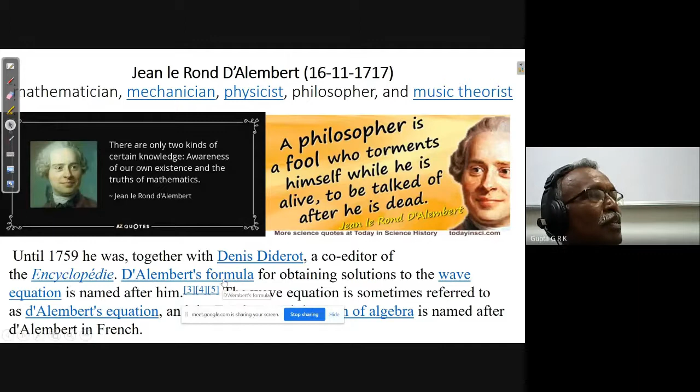So we will have lecture 36. Last class we did some problems on exergy of kinetic energy and exergy of heat transfer from a reservoir. The complete kinetic energy is exergy, or available energy. When you have heat transfer, only part of it is available and the remaining is unavailable energy - that is W reversible. If I have a reversible engine working between the reservoir and the sink, which is at environment conditions, that work is called the exergy.

When temperature is varying, I have to take the integral. We also saw second law efficiency: out of the reversible work, some work is lost due to irreversibilities, and because of this, useful work is less than reversible work. Second law efficiency is the ratio of useful work to reversible work, and it's also the ratio of first law efficiency to Carnot efficiency.

And the exergy of compressed air in a tank - if I have some highly compressed air in a particular tank, I can find out the exergy, because we know the exergy of a closed system. And the change of exergy during a compression process: whenever compression or expansion takes place, initially there will be some exergy, and after that there will be some other exergy. The difference is the change of exergy, and we lose some exergy because of the real process.

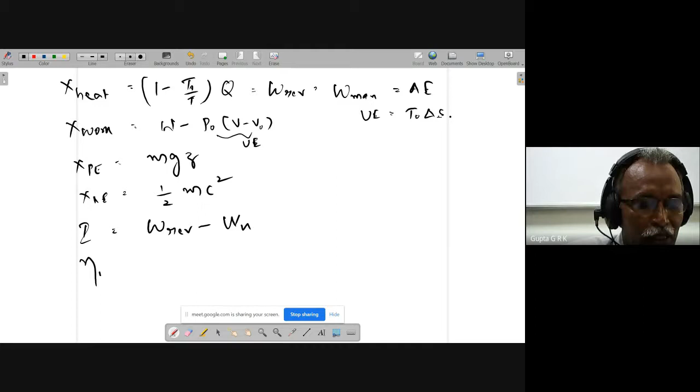And X of P is equal to mgh, mgz, and X of Ke is equal to half mc square. And if irreversibility is W reversible minus W useful, and second law efficiency is WU by W reversible, or if first law efficiency by Carnot efficiency, or 1 minus X destruction by inlet exergy.

And if you see the exergy of closed system, that is phi, for closed system, is equal to U minus U0 plus P naught into V minus V0 minus T naught into S minus S naught. If I have potential energy and kinetic energy, this is the exergy per unit mass, kilojoules per kg.

And if it is a flow system, this is X closed. So X flow is equal to psi. This is given by H minus H0 minus T naught into S minus S naught plus C square by 2, GZ. So this is the exergy of a flow system.

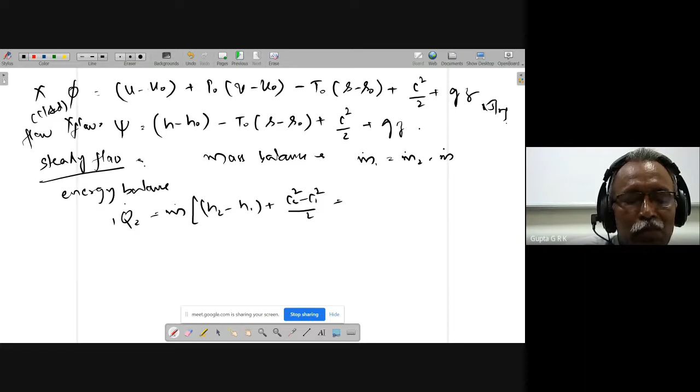And if I have in general steady flow equations, we will have mass balance, that is m dot 1 equal to m dot 2 is equal to m dot, and energy balance is: q dot 1 q2 dot is equal to m dot into h2 minus h1 plus c2 square minus c1 square by 2 plus g into z2 minus z1 plus w dot 1 2. And if I take entropy balance,

so we can write S dot gen is equal to m dot into S2 minus S1 plus sigma Q dot k by tk. And if I take exergy balance, for a steady system, taking dS CV by dt as zero, dX CV by dt as zero like that, X destruction is equal to m dot into psi1 minus psi2 plus sigma 1 minus T naught by tk Q dot k minus W dot. And this is also equal to T naught S dot gen.

So you can calculate X destruction either from this formula, or you can find out S gen from this formula, and T naught into S gen also gives the exergy destruction. And if I want to calculate S gen, I have to calculate the change in entropy and all.

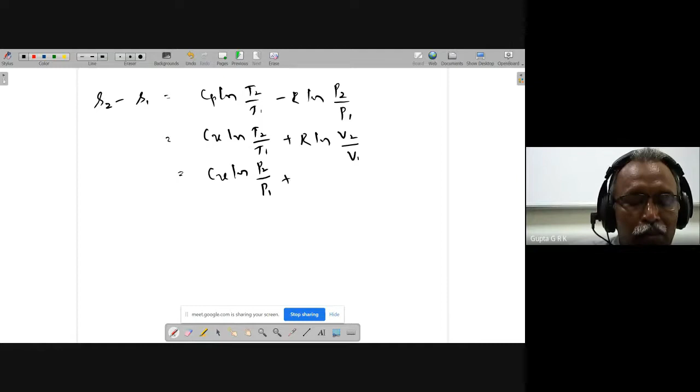And change in entropy also we have the three formulae from TDS relations. We got Cp log T2 by T1 minus R log P2 by P1. If it is a constant volume process or something like that, we can use Cv log T2 by T1 plus R log V2 by V1, or the other formula Cv log P2 by P1 plus... Cp log V2. So like that, we have three different formulae for finding change in entropy.

Because change in entropy is needed when I want to find out the change in exergy. Suppose if I want phi2 minus phi1, that will be u2 minus u1 plus p naught into v2 minus v1 minus t naught into s2 minus s1 plus c2 square minus c1 square by 2 plus g into z2 minus z1.

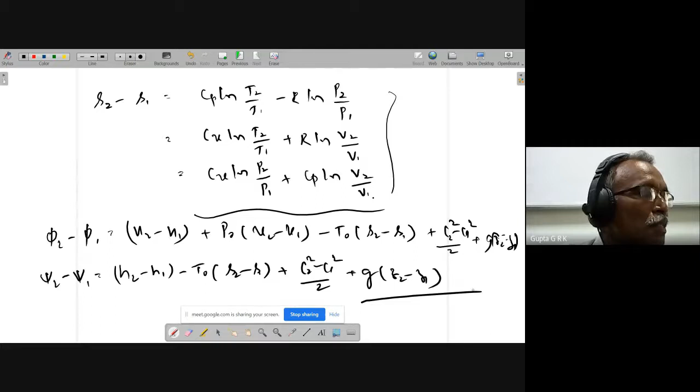And if I have a flow system, the change in exergy is psi2 minus psi1, which is h2 minus h1 minus t naught into s2 minus s1 plus c2 square minus c1 square by 2 plus g into z2 minus z1. So these are the different formulae that we come across in the availability or exergy chapter.

Okay, Raymond is asking for the solutions of problem 7. Do you want that, or exergy problems? Which way would you like to go? I think I have made this problem with answers. I think we can go through this.

A heat engine works between 300 Kelvin and 1200 Kelvin, taking heat at a rate of 500 kilowatts. Maybe, I don't know, the order may be different, so you can just check, these are all the problems. A heat engine works between 300 Kelvin and 1200 Kelvin, taking heat at a rate of 500 kilowatts and giving an output of 180 kilowatts.

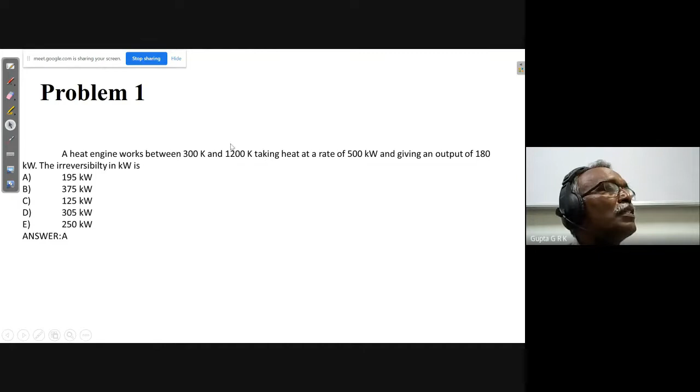Find the irreversibility. The irreversibility is W reversible minus W useful. W useful is given to be 180 kilowatts. W reversible, because I know TH and TL, I can find out efficiency, and efficiency into heat gives W reversible. This is only the questions for now.

Yeah, just 3-4 minutes. I will. It is in another computer. I will just send by mail.

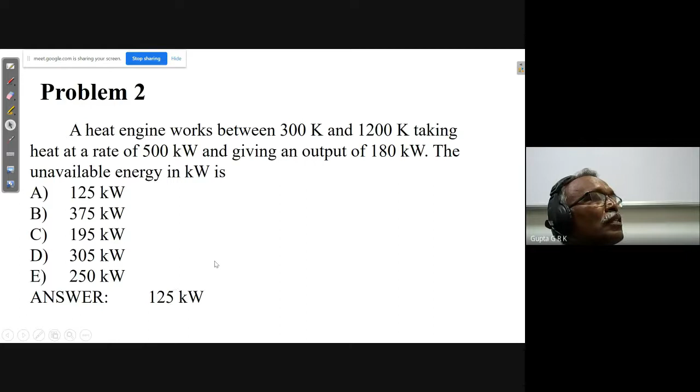A heat engine works between 300 and 1200 Kelvin, taking heat at a rate of 500 kilowatts and giving an output of 180 kilowatts. Similar thing, only it's asked to find out unavailable energy. Because we have seen W reversible as 375, so 500 minus 375, that is 125 kilowatts is the answer.

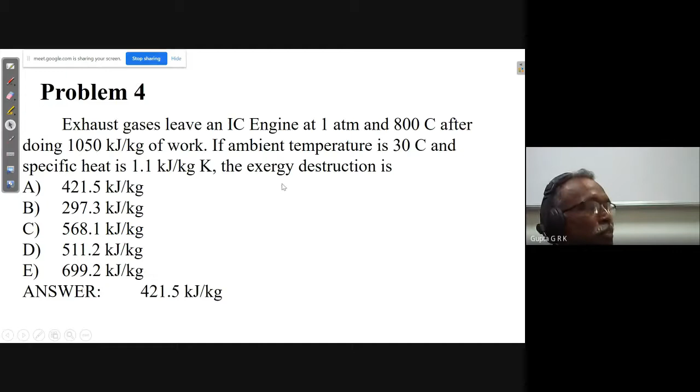Exhaust gases leave an IC engine at 1 atmosphere and 800 degrees centigrade after doing 1050 kilojoules per kg of work. If ambient temperature is 30 degrees centigrade and specific heat is 1.1, find the exergy destruction. Because exergy destruction is T naught into Sgen, and Sgen is delta S, which is Cp log T by T naught. Cp is given, and with log T by T naught I can find the exergy destruction.

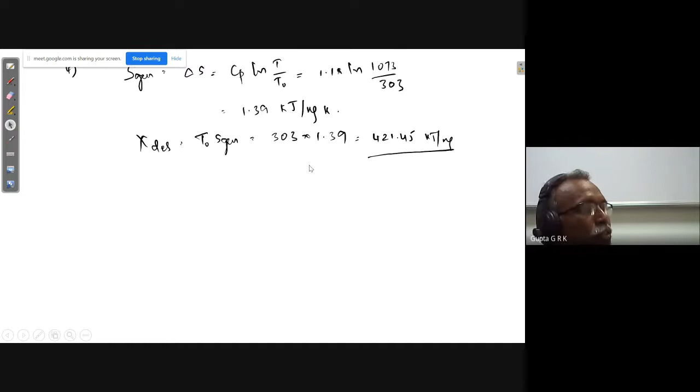The steady state heat loss through a wall is 1 kilowatt, whose wall temperature is 30 degrees centigrade and 5 degrees centigrade on either side. If the ambient temperature is 0, find the exergy destruction again. We have done this in class with wall temperatures 30 and 5 degrees. This is Q by T naught Sgen, so Sgen is Q by T2 minus Q by T1. I can find Sgen, and then T naught into Sgen is the exergy destruction.

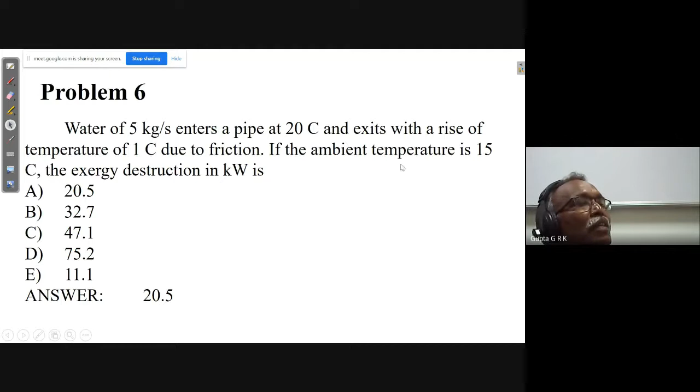Water of 5 kg per second enters a pipe at 20 degrees centigrade and exits with a rise in temperature of 1 degree centigrade due to friction. If the ambient temperature is 15, the exergy destruction again equals Sgen, which is change in entropy, MCP log T2 by T1. There's a 1 degree temperature rise, so 294 by 293, and 5 is the mass. This gives the exergy destruction.

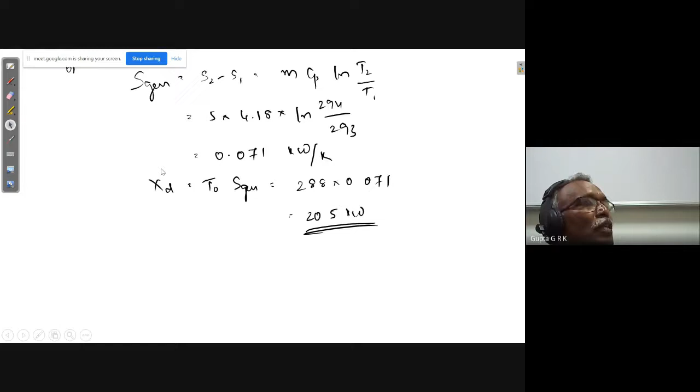150 tons of water is stored at a height of 100 meters. Its available energy is just mgh. M is 150,000 and g is 9.81 and height is 100. Because potential energy is completely available, 150,000 times 9.81 into 100 meters. So I will get it in kilowatt hours as asked, so I have to divide by 3600.

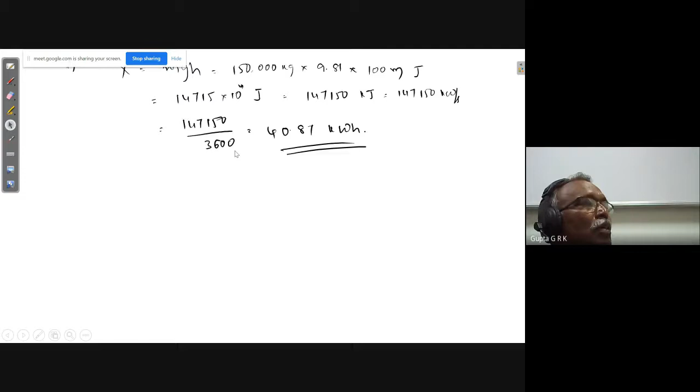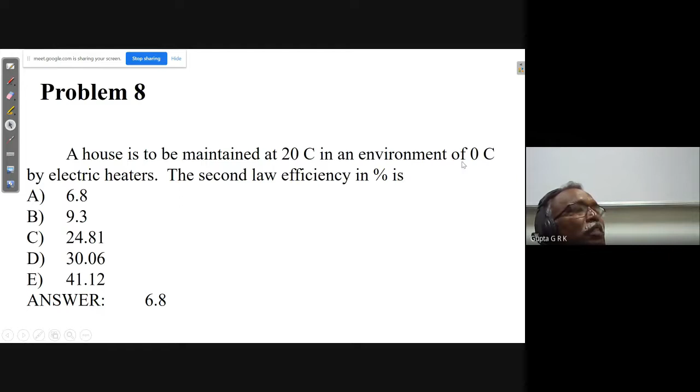A house is to be maintained at 20 degrees centigrade in an environment of 0 degrees centigrade by electric heaters. Find the second law efficiency. This also we have done in class. When I have electric heaters, the first law efficiency will be 1, or COP. So COP according to the first law is 1 because the electric power given is equal to heat developed. So COP is 1, and COP reversible I can find from the two temperatures, and COP by COP reversible gives the second law efficiency.

COP of the electric heaters is 1, and COP of reversible is TH by TH minus TL, which is 14.65, and second law efficiency is COP by COP reversible.

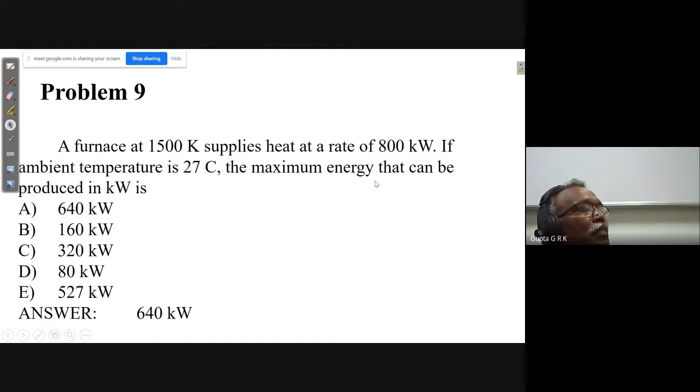So we have a furnace at 1500 Kelvin that supplies a heat rate of 800 kilowatts. If ambient temperature is 27, find the maximum energy that can be produced. Again, I have two temperatures given and heat is given. I have to find out the exergy of the heat, so 1 minus T naught by T into Q.

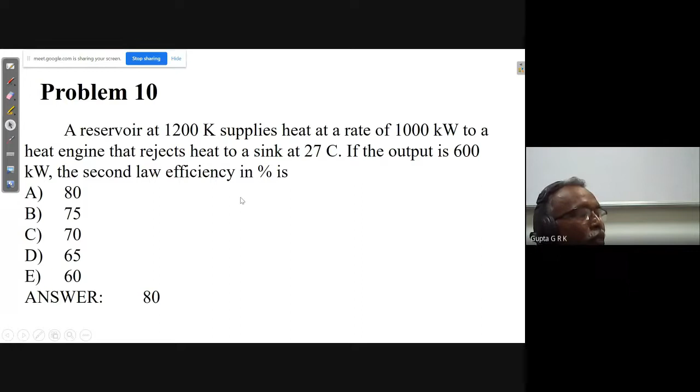A reservoir at 1200 Kelvin supplies heat at a rate of 1000 kilowatts to a heat engine that rejects heat to a sink at 27 degrees centigrade. If the output is 600 kilowatts, find the second law efficiency. Again, find out W reversible. W useful is given as 600, so I can find out second law efficiency. So with 600 and 1000, this is first law efficiency, and the reversible, this one is 0.75, and the second law efficiency is 80%.

It's T naught S gen. Again, S gen is delta S. Delta S is Cp log T2 by T1 minus R log P2 by P1. Because temperature is constant, this goes off, so it's minus R log P2 by P1, which gives the change in entropy or S gen. Mass flow is given, so I multiply by that to get it in kilowatts. So the destruction is T naught S gen.

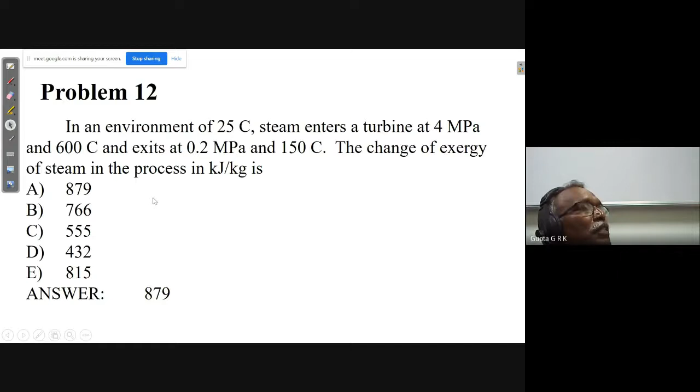In an environment of 25 centigrade, steam enters a turbine at 4 megapascal and 600 degrees centigrade and exits at 0.2 megapascal and 150 degrees centigrade. Find the change of exergy of steam in the process. The inlet and exit conditions are given, so I can find out H1, H2, S1 and S2. The change of exergy, Psi2 minus Psi1, is H2 minus H1 minus T naught into S2 minus S1. So like this I can find it out.

And dx is the decrease in exergy actually, so I put h1 minus h2 minus T naught into S1 minus S2. So from the steam tables, the superheated tables, at the inlet conditions I can find H1 and S1, and at the exit conditions I can find H2 and S2. Just substitute in the exergy formula, so this is nothing but Psi1 minus Psi2.

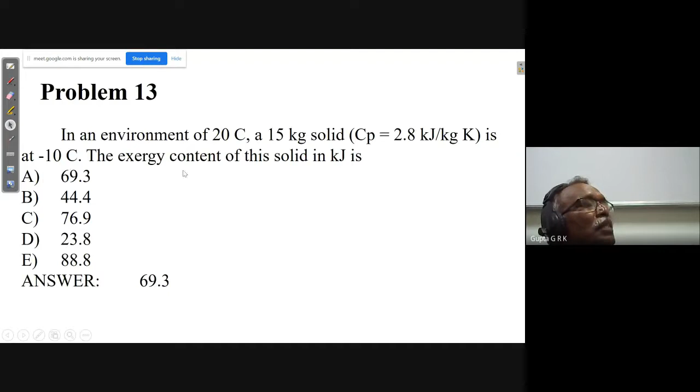Again, in an environment of 20 centigrade, a 15 kg solid whose Cp is given is at minus 10 degrees centigrade. The exergy content of this solid is asked, so it will be U minus U naught minus T naught into S1 minus S naught. So this is the exergy. I know its temperature and the ambient conditions are also given, so C into T minus T naught minus T naught C log T by T naught. In this way I can find out the exergy of the block.

A windmill rotor of 12 meters diameter is in wind velocity of 6 to 20 meters per second. If air density is given, find the maximum power that can be generated by the windmill. Again, this is kinetic energy, and the exergy of the kinetic energy is equal to half mc square. The mass is given by, because density is given, the area is given, so rho AC gives the mass flow m dot, and into c square by 2, so it becomes half rho A c cube.

So x is equal to half mc square, m dot is equal to rho AC, and substituting there I get half rho AC cube. A is pi d square by 4. Substitute here, and because density is known, diameter is known, velocity is known, I can find out what is the exergy.

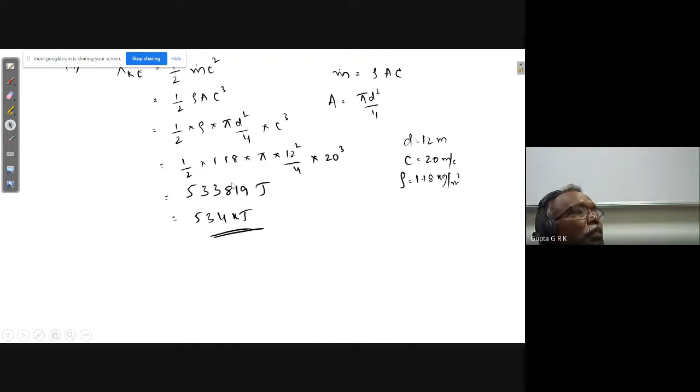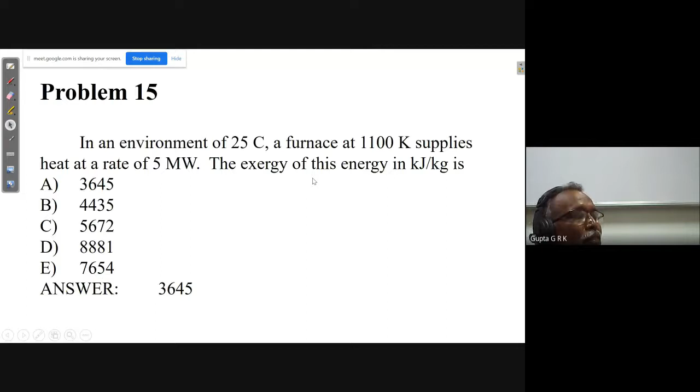Again, in an environment of 25 centigrade, a furnace of 1100 Kelvin supplies heat at a rate of 5 megawatts. The exergy of this energy is asked, and again it's exergy of heat only. So I can just compute it because T and T naught are given. Again, it is a simple exergy of heat calculation.

1 kg of gas enters a gas turbine at given inlet conditions. If the ambient conditions are given, find the availability of the gas. The availability is H minus H naught minus T naught into S minus S naught, so I know the conditions at the entry and at the environment. Because temperatures are known, S minus S naught is Cp log T by T naught minus R log P by P naught. So I know all the values P1, T1, P naught, T naught, and I can find out what is psi.

And because mass flow is given, we should not forget it. If you just compute psi, it only gives the value per unit mass, and whenever mass flow is given, I have to multiply that to get the total exergy.

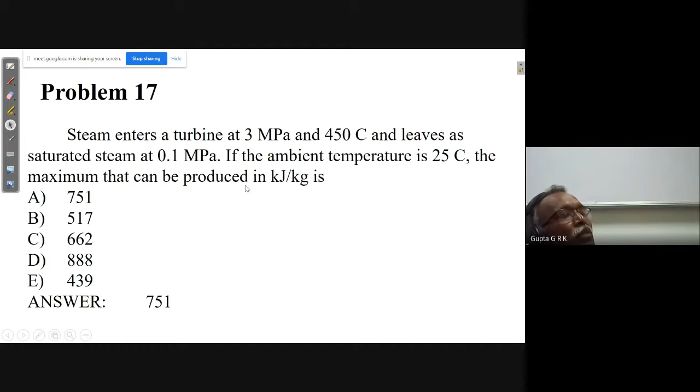If the ambient temperature is 25 centigrade, the maximum work that can be produced is found by finding psi1 and psi2, so psi1 minus psi2. Psi1 minus psi2 equals H1 minus H2 minus T naught into S1 minus S2. At the inlet conditions, I find H1 and S1 from the superheated tables, and at the exit conditions, from the saturated tables, Hg and Sg, since X2 is 1. So H2 and S2 I can find out. Just substitute, and I get the change in exergy, which is the maximum work that can be produced.

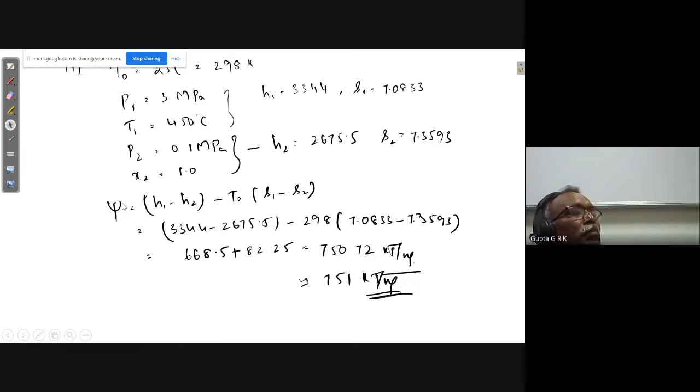Coming to the cycles, in an air standard Otto cycle, the temperatures at the beginning and at the end of compression are 27 degrees centigrade and 327 degrees centigrade, and its efficiency is asked. So here T1 and T2 are given. From which I can get V1 by V2, because 1 to 2 is isentropic compression, so I can find out the compression ratio. Once I get the compression ratio, 1 minus 1 by R to the power of gamma minus 1 gives the Otto cycle efficiency. So T1 is 300, T2 is 600.

So V1 by V2 equals T2 by T1 to the power of 1 by gamma minus 1. So 1 by gamma minus 1 is 2.5, and this gives the compression ratio R. And the efficiency is 1 minus 1 by R to the power of gamma minus 1. Substituting R, I find the efficiency as 50%.

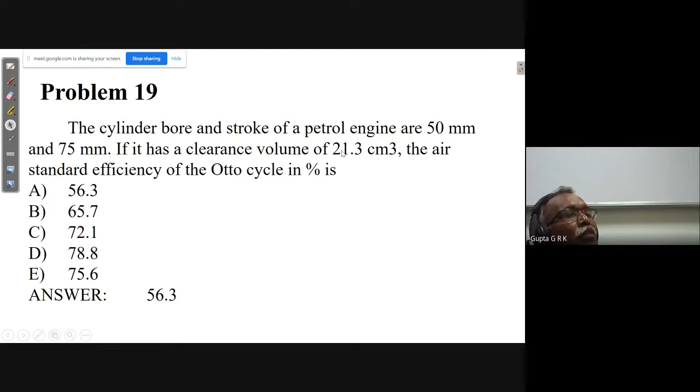The cylinder bore and stroke of a petrol engine are 50 mm and 75 mm. This gives the stroke volume, pi d squared by 4 into L. That gives the stroke volume, and the clearance volume is given. So I can find V1, which is the sum of Vs and Vc, and Vc, the clearance volume itself, is V2. So V1 by V2 gives the compression ratio, and I can find the Otto cycle efficiency. Like this, D and L are given, and the clearance volume is given, which is V2.

So this is clearance volume V2, and the stroke volume is pi by 4 d squared L, so I can find that out, and this is V1. Vs is only this much, and V1 is the total: Vs plus Vc, which gives 168.56. R, the compression ratio, is V1 by V2, which gives 7.913, and again using the formula 1 minus 1 by R to the power of gamma minus 1.

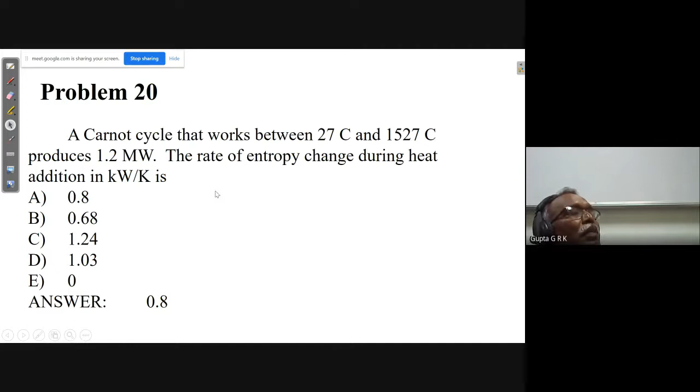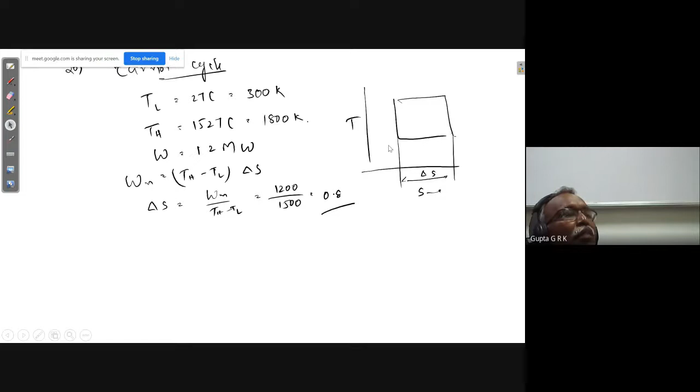TL is this much, TH is this much, and W, the work, is equal to TH minus TL into delta S. So W is delta S times that difference. TH is given, TL is given, and WN is given, so delta S is WN by TH minus TL. Because the work is nothing but the area inside the cycle, and TH is known, TL is known, and the area is WN, that is given to be 1.2 megawatts, and I can find out what is delta S.

And if pressure ratio is given, V1 by V2 equals P1 by P2 to the power of 1 by gamma. I can find out what is V1 by V2, or R, which is 6.92, and then find the efficiency.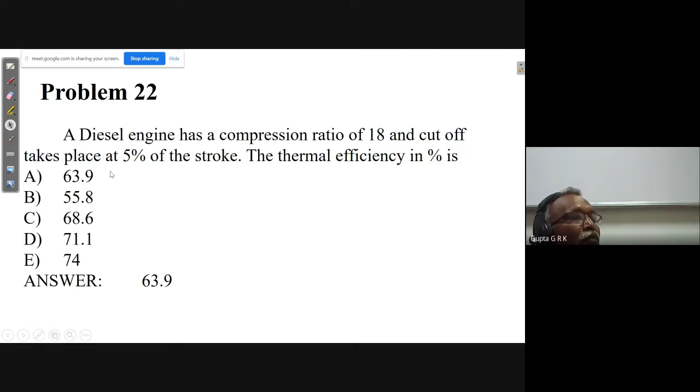We know that diesel cycle efficiency is a function of cutoff ratio and compression ratio. Compression ratio is given, cutoff ratio I have to find out based on this data. Cutoff takes place at 5% of the stroke. So if I draw the graph, this is the whole stroke, and this is 5% of the whole stroke.

V3 is equal to Vc plus 0.05 Vs. Vc here, and this is 5% of the Vs. And V1 by V2 is 18, so V1 is 18 V2. Vs is V1 minus V2, that is 17 V2.

So this is 1.85. In this way I can find out what is the cutoff ratio. This is the formula we have in terms of R and RC. So RC is obtained here, and I can find out the efficiency.

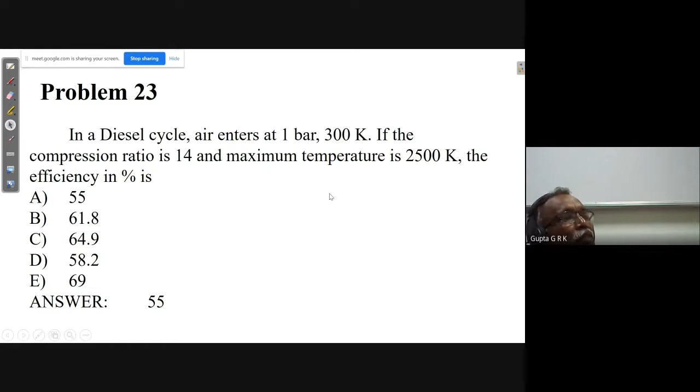Again, diesel cycle, air enters at 1 bar, 300 Kelvin. If the compression ratio is given, and the maximum temperature is 2500 Kelvin, so the T3 is given. You will be knowing T2 and T3, and based on that T3 by T2, V3 by V2, I have to find out, like this.

So R is 14 given, and T3 is 2500 Kelvin, and from the compression ratio I can find T2. So T3 by T2 gives me V3 by V2, which is the cutoff ratio, and that I have to use in the formula to find the efficiency of the diesel engine.

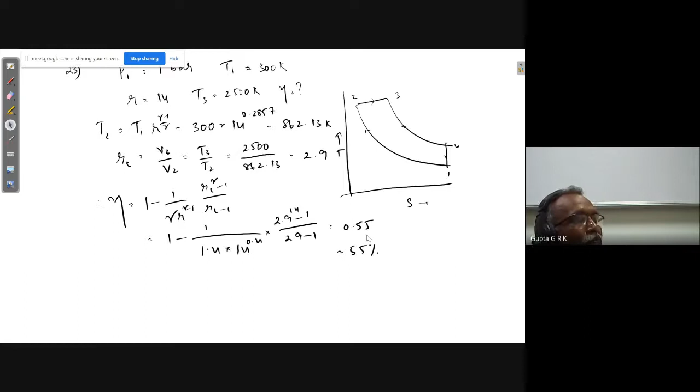Coming to the Brayton cycle, these problems must be easier for you because they are in turbomachines also. The inlet conditions of an ideal Brayton cycle are 1 bar and 298 Kelvin. If the pressure ratio is 5, the maximum temperature is 923, find the efficiency.

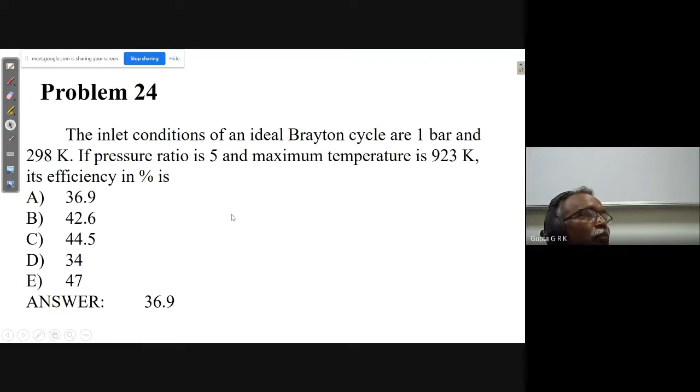Efficiency is 1 minus 1 by R power gamma minus 1 by gamma, or 1 minus 1 by C, where C is R power gamma minus 1 by gamma. So if you find 1 minus 1 by R power gamma minus 1 by gamma, you get it. It's straightforward, I need not know T3 and T1 actually.

Here it is asked to find out the net work, so I need those things. The inlet conditions again are 1 bar, 298 Kelvin, pressure ratio is 5, and maximum temperature is 923, and find its net work.

If you remember, in terms of non-dimensional things, W by Cp T1 equals t into 1 minus 1 by C, into minus C minus 1. If you divide this by Cp T1, you get small t into 1 minus 1 by C, minus C minus 1. That way also you can find out, or you can just write T2 by T1 is compression with the pressure ratio to the power of gamma minus 1 by gamma.

So I will get T2, and T3 is given. Again T3 by T4 is R power gamma minus 1 by gamma. I can find T4, and turbine work is Cp into T3 minus T4. Compressor work is Cp into T2 minus T1, and turbine work minus compressor work gives me the net work.

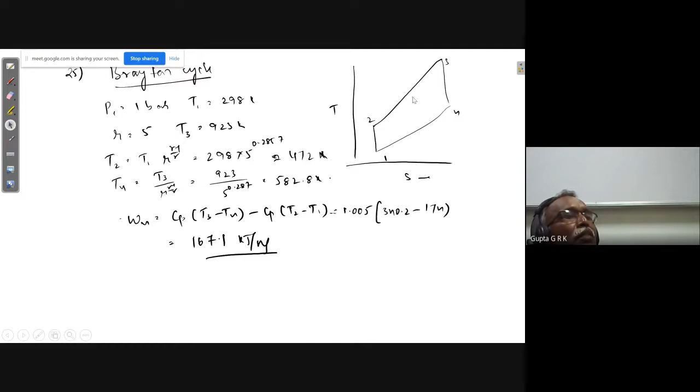And if you are asked to find the efficiency also, input is Cp into T3 minus T2. So Wn by Q, you can get the efficiency.

I think it is like that only. The inlet conditions of an ideal Brayton cycle with heat exchanger are 1 bar and 298 Kelvin. If the pressure ratio is 5 and maximum temperature is 923 Kelvin, find its efficiency.

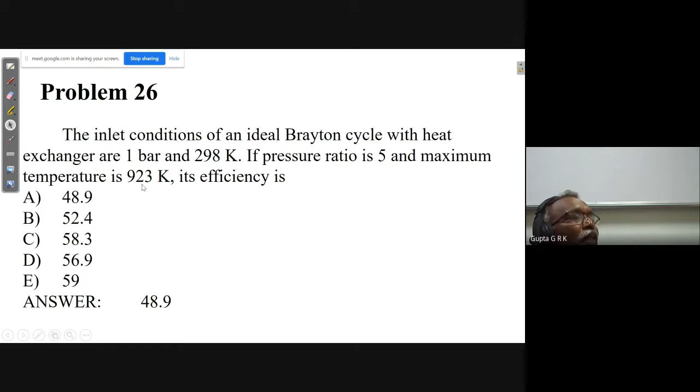Actually the formula is 1 minus C by t, where C is R power gamma minus 1 by gamma, and small t is T3 by T1. If you see the Ganesan book, you can see this formula. So C and t are known, so 1 minus C by t, that is the first.

If an ideal Brayton cycle works between 300 Kelvin and 1073 Kelvin, find the maximum work done in kilojoules per kg. So this is T1 and this is T3. There is a small formula: root of T3 minus root T1, whole square, gives me W max, Cp into root T3 minus root T1 whole square. So you can find out like this.

W is T into 1 minus 1 by C minus C minus 1. If you differentiate this, you can find out the optimum C, which is root T. Substituting root T here: T minus 1 by root T minus root T minus 1. Taking LCM, root T minus 1 by root T, common root T minus 1 into root T minus 1, gives root T minus 1 whole square. Small t is T3 by T1. Simplifying, root T3 minus root T1 by root T1 square. This T1 and T1 cancel out, so W max is Cp into root T3 minus root T1 whole square. You can just get this.

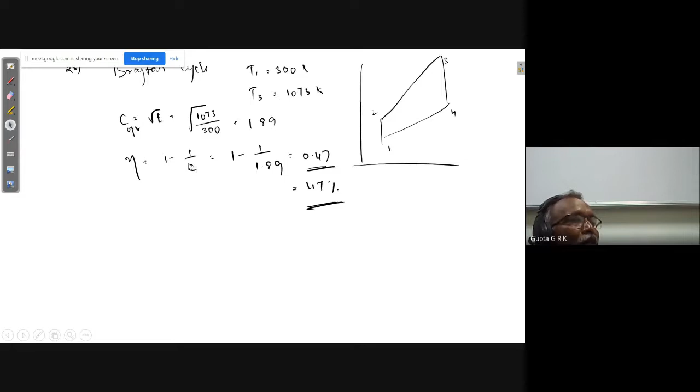Once I know the pressure ratio, again eta equals 1 minus 1 by C. So 1 by C is nothing but R power gamma minus 1 by gamma. So this is the efficiency.

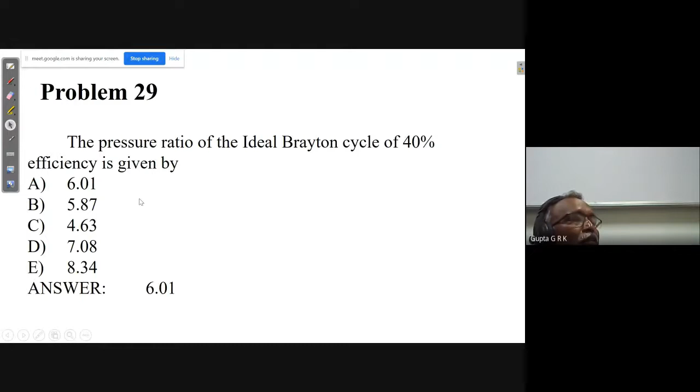The pressure ratio of an ideal Brayton cycle with 40% efficiency is given. The efficiency is given, and I have to find the pressure ratio. It is just reverse: 1 minus 1 by R power gamma minus 1 by gamma is given to be 0.4. So I take 0.4 to this side, giving 0.6, and taking the power of 0.2857, this becomes 6.

If cutoff takes place at 5% of the stroke for a diesel engine with a compression ratio of 14, find its thermal efficiency. So cutoff is given and compression ratio is given. Here V3 minus V2, that is this, by Vs, is the percentage of the stroke. Because this is Vs, and Vs is V1 minus V2, this is given as 0.05, 5%. So you can get from this what is the cutoff ratio, which you will get as 1.65. If I substitute cutoff ratio and compression ratio, I can get the efficiency of the diesel engine. So only thing here, the 5% of the stroke is given, because cutoff takes place after this length: V3 minus V2 by Vs, and Vs is nothing but V1 minus V2. That is the way we find the cutoff ratio.

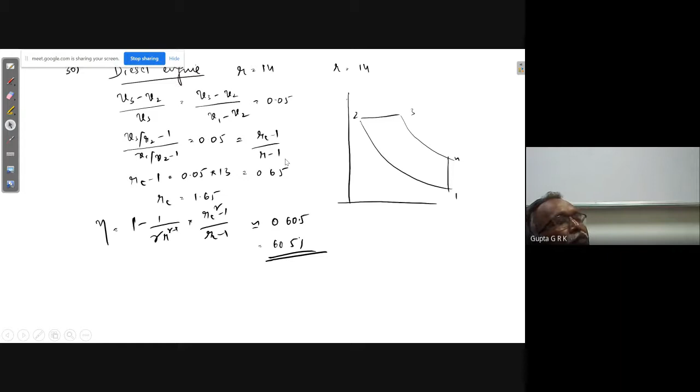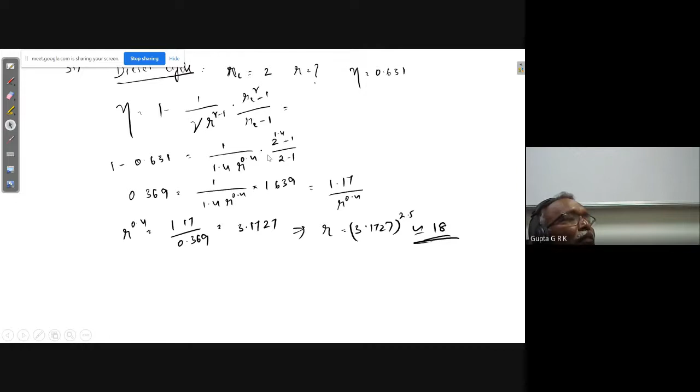For a diesel cycle with efficiency equal to 0.631, if the cutoff ratio is 2, find its compression ratio. Again you write the diesel cycle efficiency formula, where R and RC are the variables. Efficiency is given, RC is given, you have to find R. Only R is the unknown here. Substitute all the remaining things and I can get the compression ratio.

The efficiency of an ideal Brayton cycle with heat exchanger, with a pressure ratio of 1.3, maximum and minimum temperatures of 1700 and 300, is given. As I told, the efficiency of an ideal Brayton cycle with heat exchanger is 1 minus C by T. Pressure ratio gives me C, and T3 by T1 gives me T. I can find out 1 minus C by T. C I can find out, and small t is 1700 by 300, and I can find the efficiency. So this is the way I can get it.

The last problem: if the compressor of a gas turbine cycle has inlet and exit temperatures of 290 Kelvin and 460 Kelvin, find its pressure ratio. It's just that temperature ratio equals pressure ratio to the power of gamma minus 1 by gamma. So I can find the pressure ratio as temperature ratio to the power of gamma by gamma minus 1. So I can get this, and this is the way.

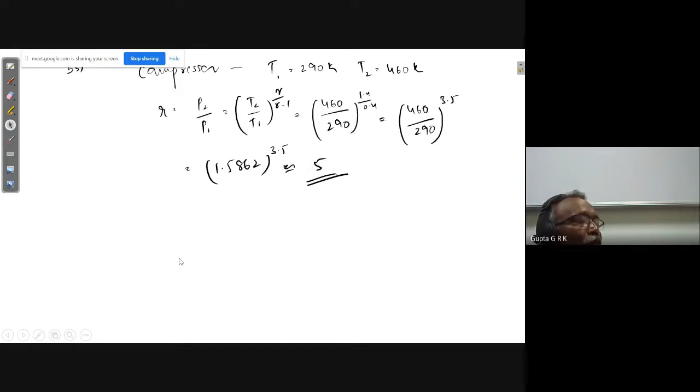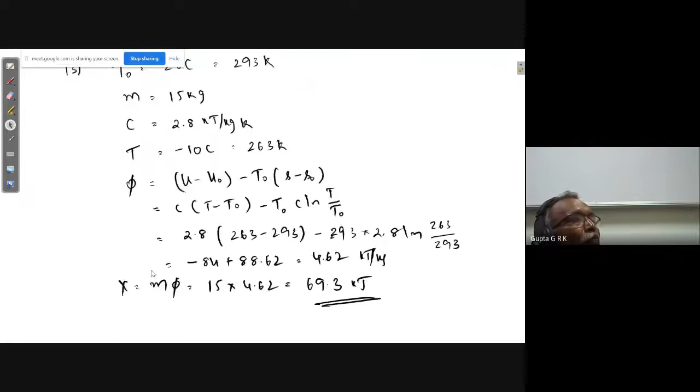Any questions on the problems that we have discussed? No. In gas turbines, whatever efficiency we talk about is first law efficiency only. In turbo machines, when you talk about gas turbines, all the efficiencies I have discussed—Otto cycle, diesel cycle, Brayton cycle—all are first law efficiencies only.

So these are the problems we have discussed in the last class. I'll go through them quickly again because they cover most of the main concepts.

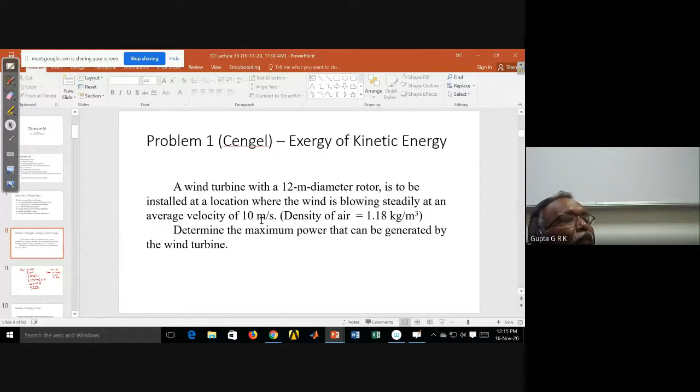Exergy of kinetic energy, this is given in your quiz also, the minor also. That is half rho A V cubed.

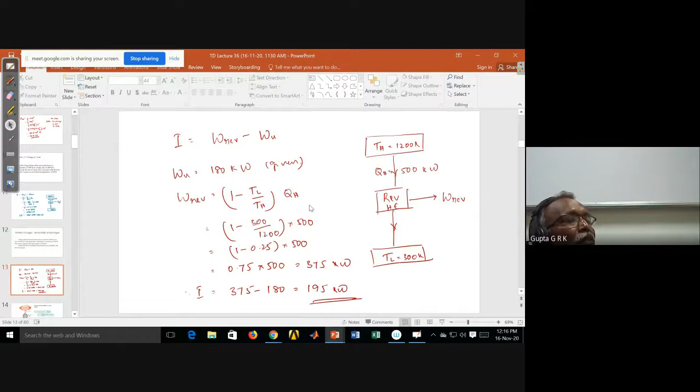Exergy of heat, these types of problems also I have given already, some 3 to 4 problems on this. And irreversibility, this is also given, the same problem I think we have in the minor. So irreversibility is W reversible minus W useful.

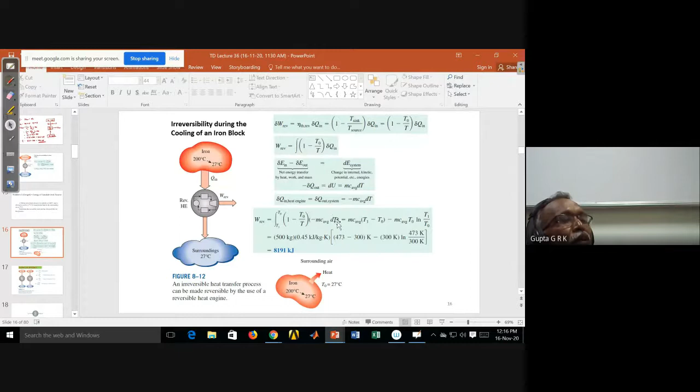And the exergy of variable heat source, whenever the temperature is changing, say 200 degrees centigrade to 27 degrees centigrade. I have to use 1 minus T naught by T, delta Q. Since temperature varies, I have to take the integration, and delta Q is mCp dt. I substitute and take the integration, that is the way we have done it.

And second law efficiency for heat engine, and also refrigerator and heat pump also, you can see.

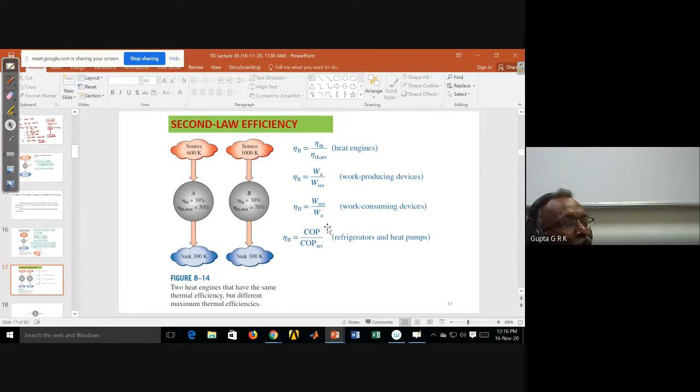These are the examples. And the exergy of heat from a source of varying temperature, same thing, integrating 1 minus T naught by T, mc dt, I get that.

Actually from here, reversible work is 8191. The amount of heat supplied is 38,925 mcdt, out of which we got only reversible work as 8191, and irreversibility is W reversible minus W useful, because it is not used at all, the complete amount is wasted.

But if this work is used to run a heat pump instead, whatever remains out of this reversible work is used to heat the house, and this 8191 I can use to run the heat pump. So if I run a heat pump like this, between the house temperature and the environment temperature, I can find out what is the COP of this.

So 300 by 22, this is 13.6. So I have COP of 13.6. 13.6 times the work 8191 gives me this much heat. Already I have got 30,734 kilojoules, and here I am getting 111,398 kilojoules. So total I will get 142,132 kilojoules, if instead of wasting that heat, I can develop this.

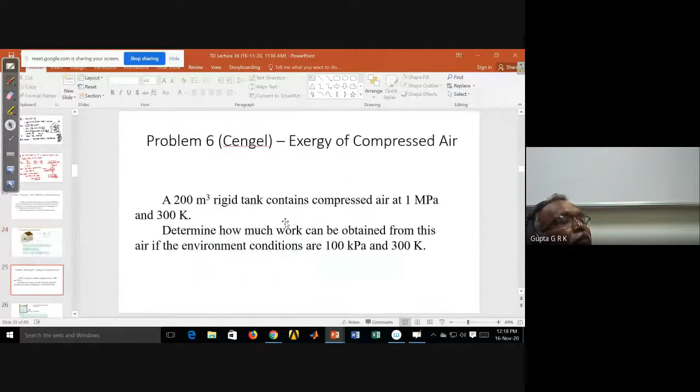And exergy of compressed air, this also we have discussed in the last class. For compressed air, I have the conditions at the present compressed state, and I have the environmental condition. So exergy is nothing but P0 into V1 minus V0, minus T0 into S1 minus S0. Actually U1 minus U0 should also be there, but since temperature inside and outside are the same, it becomes 0.

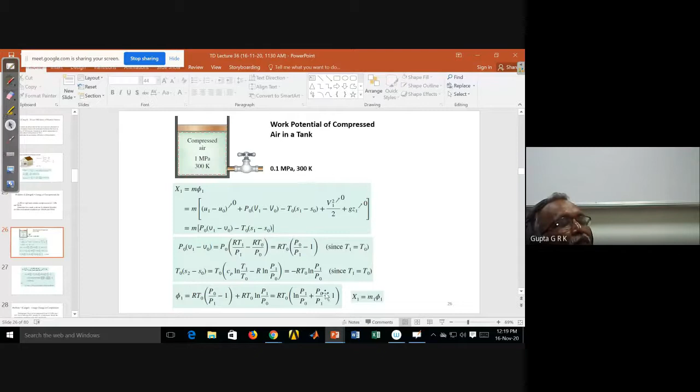And S1 minus S0 is Cp log T1 by T0 minus R log P1 by P0. Again, because temperatures are the same, this term will not be there. If I write everything in terms of pressures, since I know the pressure inside and outside, I can find out the exergy this way.

And exergy change in compression. If I have a refrigerant being compressed, with inlet conditions given where I can get the properties, and exit conditions also given, I can get the properties from the R134A tables. Taking the environment conditions to be like this, I can find out what is the exergy change. Exergy change is nothing but Psi1 minus Psi2, or Psi2 minus Psi1, since it is compression, Psi2 will be more.

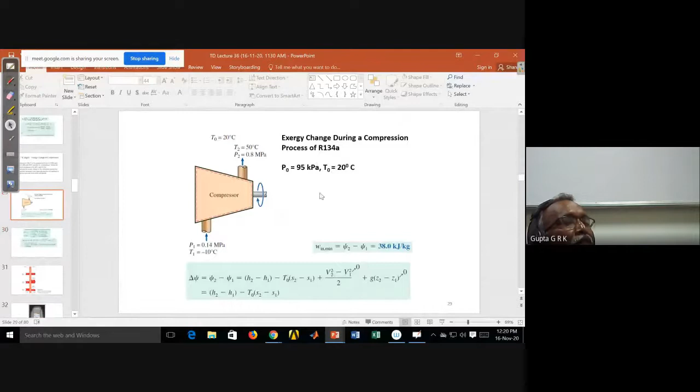Psi2 minus Psi1 is H2 minus H1 minus T0 into S2 minus S1, because H1, S1, H2, S2, I can find out at the inlet and exit conditions. The ambient conditions are needed for T0, which I substitute here. So just substituting the values T0, H1, S1, H2, S2, I can get the change in exergy, or the minimum work to be supplied.

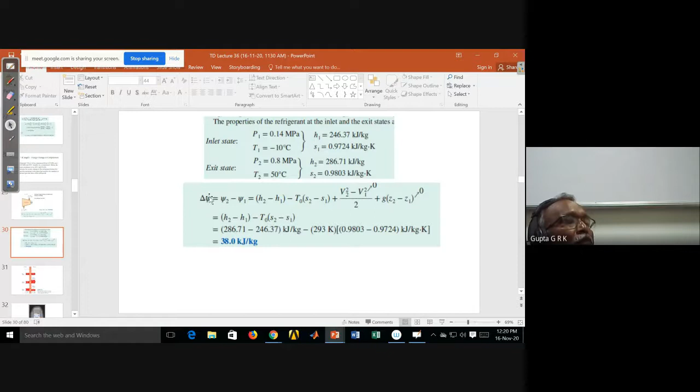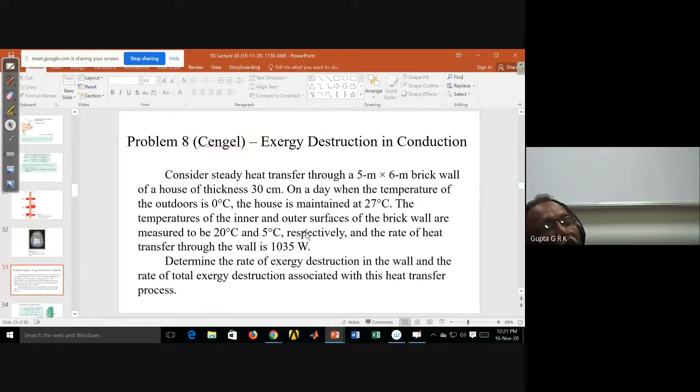Also we have discussed that exergy destruction is always positive, but change in exergy can be positive or negative, just like entropy. And exergy destruction in conduction through the wall, like the previous figure, if the inner and outer temperatures are 20 and 5, then I can find Q into 1 minus T0 by T in, and Q into 1 minus T0 by T out.

And so on the outside also, because 27 reduces to 20, and here 5 reduces to 0, that external exergy destruction also I can find from here, which is 93.2.

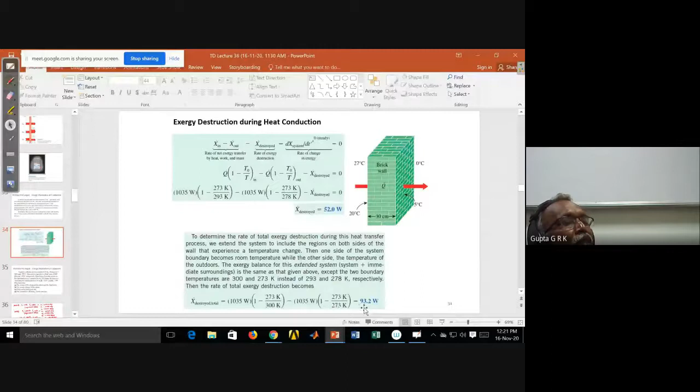And exergy destruction in expansion. Consider a piston cylinder device which has 0.05 kg of steam at 1 megapascal and 300 degrees centigrade. Because it is steam, I can find the initial conditions. Now the steam is expanded to a final state of 200 kilopascals. It is a piston cylinder device, so it is a closed system, and it is doing work.

Heat losses from the system to the surroundings are estimated to be 2 kilojoules. Here heat loss also is given, so this also is to be considered, not only the change in exergy. When you find the exergy destruction, if you remember, we have written this in the exergy destruction expression — not only the change in exergy, but also, because there is heat transfer, this also will be lost.

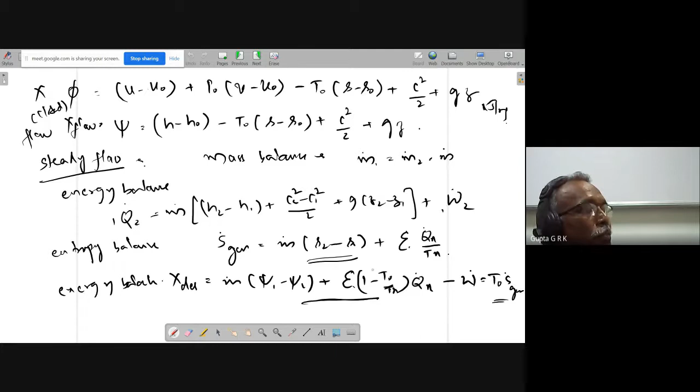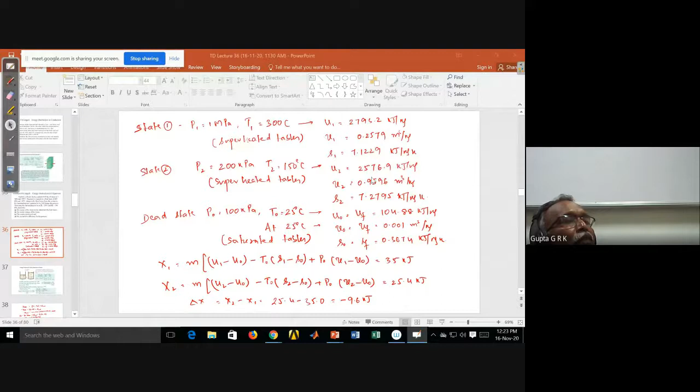Now again, steam inlet conditions from the superheated tables, exit conditions from the superheated tables. I have U1, V1, S1, U2, V2, S2. I am taking U1, not H1, because it is a closed system. So X1 is M into U1 minus U naught minus T naught into S1 minus S naught, plus P naught into V1 minus V naught. So I have these ambient conditions.

So here T naught and P naught are given. The steam conditions at T naught and P naught, because whenever it is in the liquid state, I have to find UF, VF, and SF at 25 degrees centigrade — the saturation temperature I have to take. So I have to consider these and get the exergy at the inlet or initial conditions, and get the exergy at the final condition. I can then find the change in exergy.

And not only that — because this is a closed system, P naught into V2 minus V1 is the unavailable energy, which is 5.3. That also I have to find. So 9.6 minus this 5.3, I have to remove, giving 4.3 kilojoules. So this is the exergy destruction.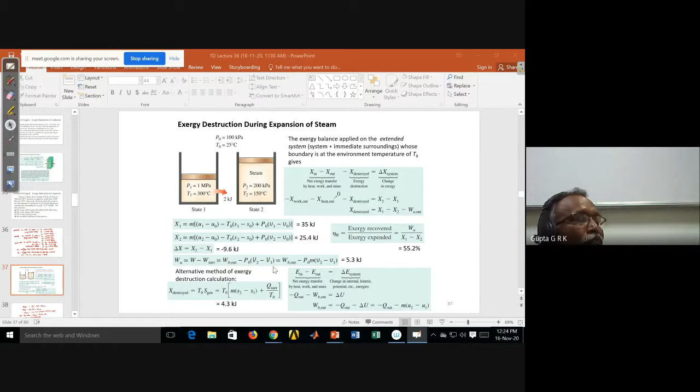And the exergy destroyed during stirring of a gas. An insulated rigid tank contains 0.9 kg of air at 138 kilopascals and 21 degrees centigrade. Initial conditions are given. Now a paddle wheel inside the tank is rotated by an external power source until the temperature in the tank rises to 55 degrees centigrade. This is the final condition, and work is given and surrounding temperature is given.

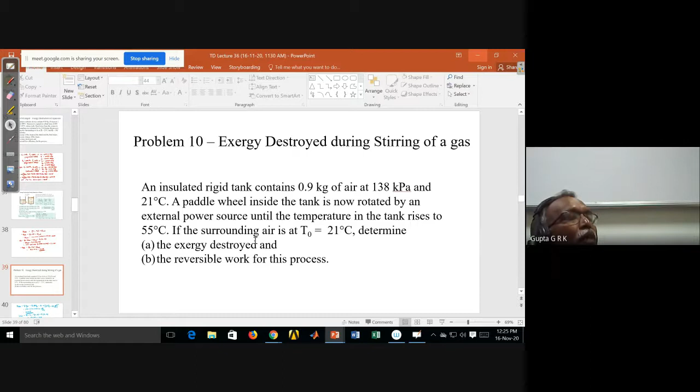So X destroyed, the exergy destruction, is T naught into Sgen, that is T naught into delta S of the system. And this is delta S. I am given that, because this is a closed system, V2 by V1 term, log V2 by V1, is 0. So I use CV log T2 by T1. I will not use CP here.

So this gives T naught Sgen, and W reversible, that is the change in exergy, that is U2 minus U1 minus T naught into S2 minus S1. So I will get M CV into T2 minus T1, and T naught into S2 minus S1 is already calculated. So this is the reversible work.

And in this way also we can do here, because the temperature is changing. I can take the integration from 1 to 2 of 1 minus T naught by T, MCV dt. This is the way we have done the previous problem, so in this way also I can do it. If I do it, I will get MCV into T2 minus T1 minus T naught log T2 by T1. This is actually these two expressions — this is one expression, and this is the other expression.

So you will get the same things here. And exergy of heat transfer between tanks. Two constant volume tanks, each filled with 30 kg of air, have temperatures 900 Kelvin and 300 Kelvin. A heat engine placed between the two tanks extracts heat from the high temperature tank, produces work, and rejects heat to the low temperature tank. Determine the maximum work that can be produced by the heat engine and the final temperatures of the tanks.

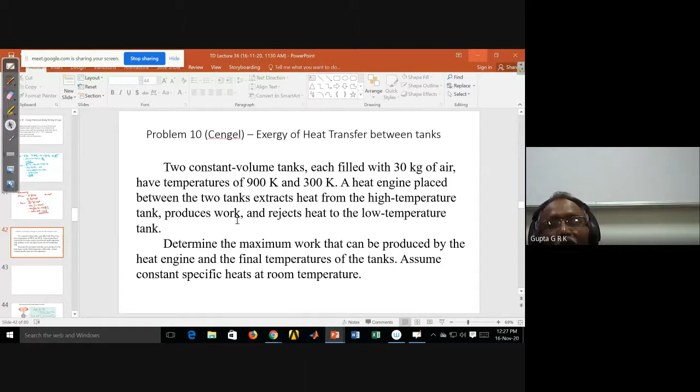So if I have two reservoirs, and if I want maximum work, I want Sgen for reversible W. So Sgen will be equal to 0. If Sgen equal to 0, delta S of source plus delta S of sink, the total change in entropy will be 0. So MCV T2 by T1 of the source and MCV T2 by T1 of the sink is equal to 0 actually, because both are constant volume, this is 0. And if I add these two, I get log of T2 square by T1A, T1B.

So T2 is root of T1A and T1B, and these are the initial temperatures of both source and sink. And if I want to find the heat transfer, because I can find the final temperature, once I know the final temperature, MCdT of this gives me the heat taken from here, and MCdT of this gives the heat gained by the sink. That is the way we do it here. T2 is equal to root of 900 and 300, that gives the final temperature.

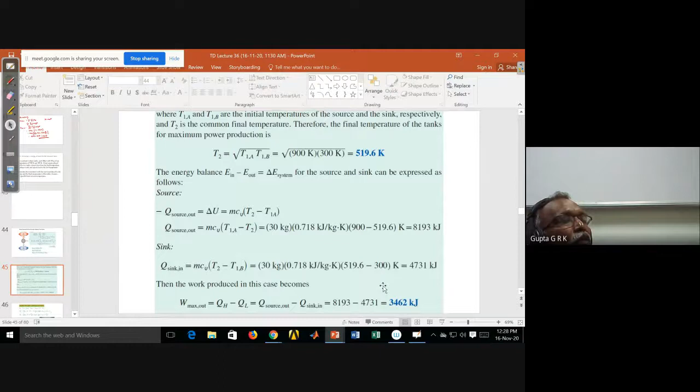Once I get the final temperature, Q, the heat lost from the source is mCv dT, and the heat gained by the sink is mCv dT - this is heat lost, and this is heat gained. So the reversible work will be the difference between these two. W max out is equal to QH minus QL. That gives me the maximum work that can be obtained. That's what we asked - maximum work that can be produced by the heat engine, and final temperature of the tanks is T2, right?

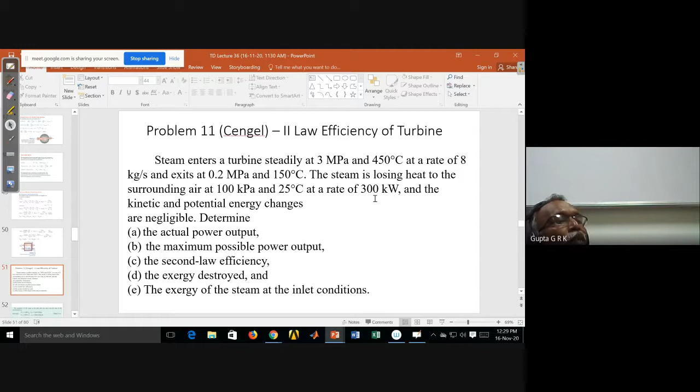These are energy balances. This is second law efficiency of the turbine. Again, this is also given as a quiz problem. The steam enters at the initial conditions and exits at the final conditions, and steam loses heat to the surrounding. This is additional. Steam is losing heat to the surrounding air at 100 kilopascal and 25 degrees. This is okay, no problem. At a rate of 300 kilowatts - this is Q. This additional thing is there.

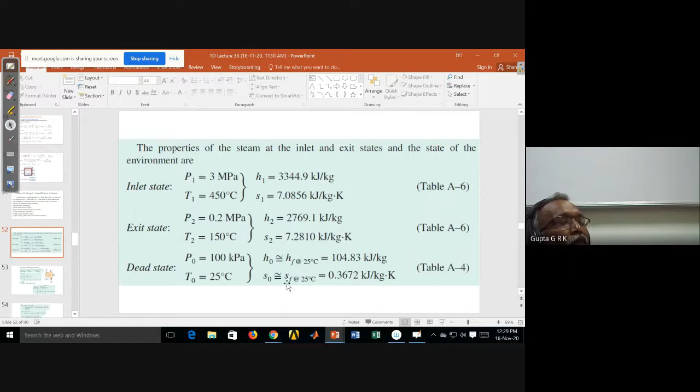At T1, I know H1, S1, P2, T2, H2, S2, and at T0 I can find H0, S0 at saturation temperature 25 degrees centigrade. So I can find the W out from the first law: m dot into H1 minus H2 minus Q dot out. This is this. And W reversible out is m dot into psi1 minus psi2. And psi1 and psi2 are H1 minus H2, and T0 into S1 minus S2. All these things already we got. So the W reversible out is m into H1 minus H2 minus T0 into S1 minus S2. So this is the reversible work.

And first law gives the useful work. So useful work by reversible work will give me second law efficiency. And exergy destruction is reversible work minus useful work. So this is the way we can find it out.

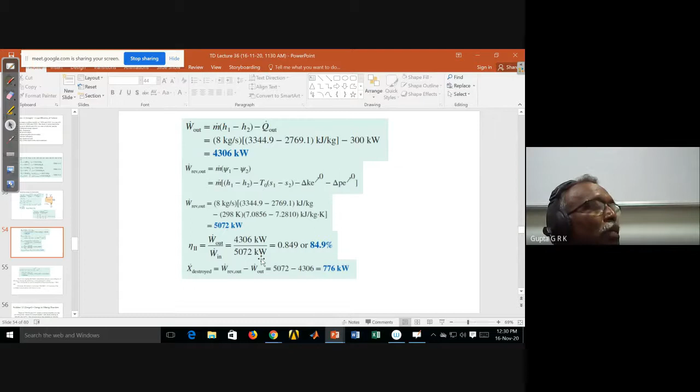And we will see the story - a sweet, salty, touching love story. There is a love story, maybe you like it. So there is a hero and a heroine, and he met her on a party. She was so outstanding, many guys chasing after her, while he was so normal, nobody paid attention to him. At the end of the party, he invited her to have coffee with him. She was surprised, but due to being polite, she promised. They sat in a nice coffee shop. He was too nervous to say anything. She felt uncomfortable and thought, please let me go home like that. Suddenly he asked the waiter, would you please give me some salt? I would like to put it in my coffee.

Everybody stared at him, it was so strange. His face turned red, but still he put the salt in his coffee and drank it.

She asked him curiously, why do you have this hobby? He replied, when I was a little boy, I was living near the sea. I liked playing in the sea. I could feel the taste of the sea, just like the taste of salty coffee. Now, every time I have salty coffee, I always think of my childhood, think of my hometown. I miss my hometown so much. I miss my parents who are still living there.

While saying that, tears filled his eyes. She was deeply touched; that was his true feeling from the bottom of his heart. A man who can tell his homesickness must be a man who loves home, cares about home, has a responsibility for home. Then she also started to speak, about her faraway hometown, her childhood, her family. That was really a nice talk, also a beautiful beginning of their story.

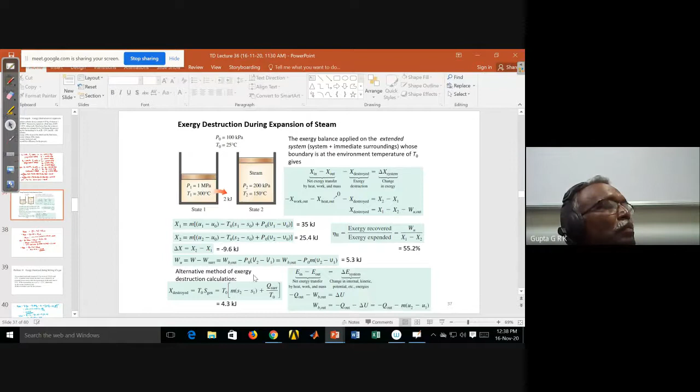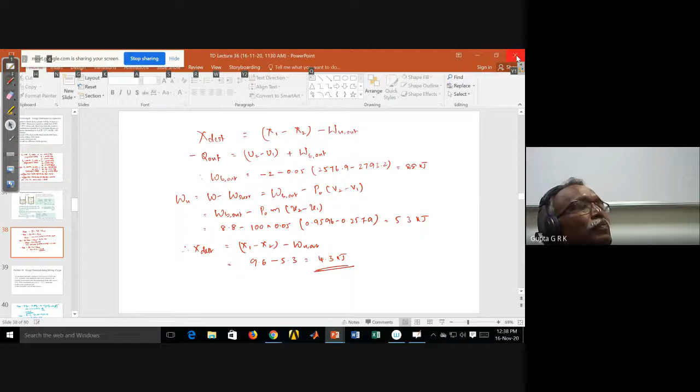Here, actually, there are two ways of doing it. So if you are... okay, I will let you know later. Right? I will let you know later in the next class.